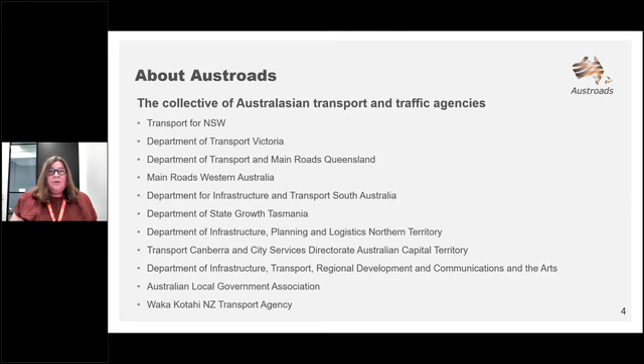So a bit about Austroads. We're the collective of Australasian transport and traffic agencies, and that's the organisations that are listed on this slide. Our focus is to support our member organisations to deliver an improved road transport network. So today's project was delivered under the Transport Infrastructure Program, and that program is managed by Ross Guppy.

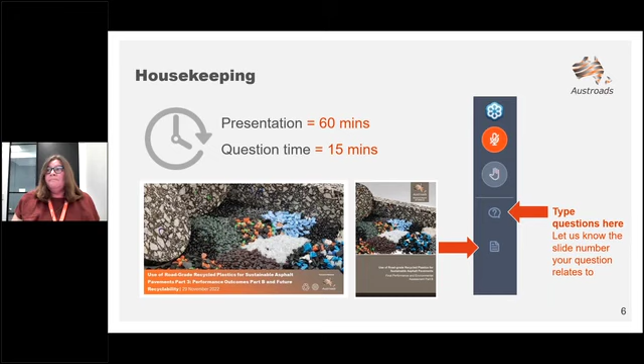The first presenter is Andrew Papacostas. Andrew is the Principal Engineer, Pavements, Geotech and Materials at the Department of Transport, Victoria. Our second presenter is Associate Professor Filippo Giustozzi. Filippo is leading the Intelligent Materials for Road and Airport Pavements Research Group at RMIT University. We are also joined by Yoongjai Boom, a Civil Engineering PhD student at RMIT University, and Dr. Marie Enfrin and Dr. Dai Lu Xuan, postdoctoral research fellows at RMIT.

So today's agenda: we'll first hear from Andrew, who's going to introduce the project. Then Filippo will take us through laboratory testing of incorporating recycled plastics into asphalt via the mixed method. We'll hear about emissions from plastic modified asphalt presented by Yung, followed by Marie, who will talk about microplastics release from plastic modified asphalt. Di will focus on future recyclability of plastic modified asphalt, and the presentation will then be concluded by the summary of project findings from Filippo.

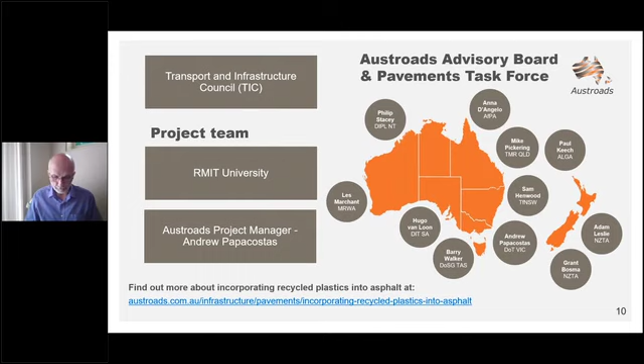Today's webinar presents findings of the remaining comprehensive testing that was completed and recently published in report number 3B. All reports and previous webinars are freely available from the Austroads website. I now hand over to Filippo to provide the outcomes of the remaining testing that was undertaken and reported in report 3B.

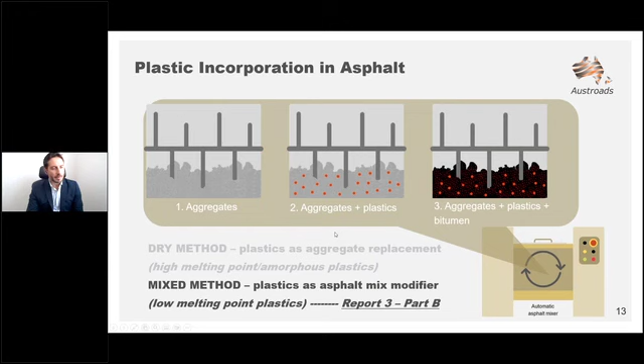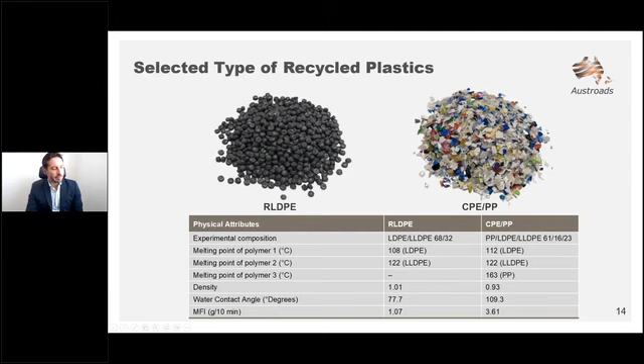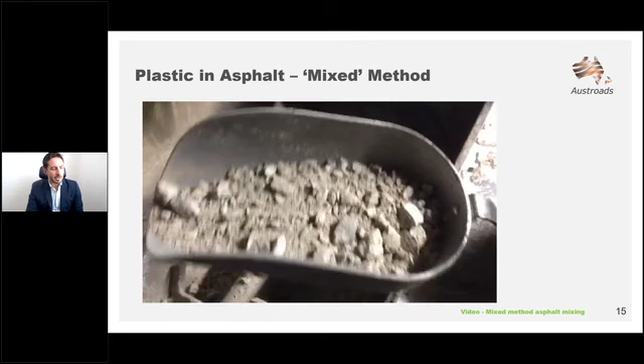Just a quick video in terms of how the mix method actually works. It may be a bit laggy at your end, but Austroads has provided you with the video in the hand-out materials. So you've seen there plastics being added to the aggregates only, and after a thorough mixing, the plastic has basically disappeared. This is what you get at the end of the mixing between aggregates and plastics before adding the binder.

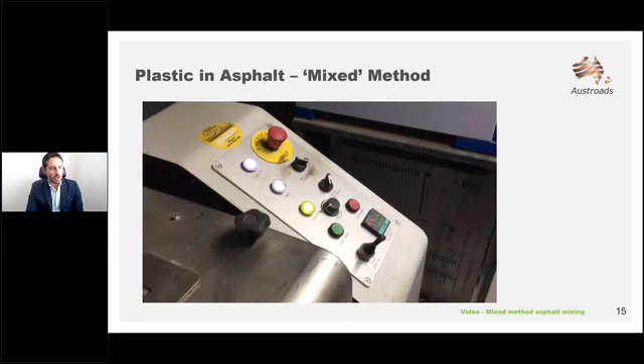After this step, everything goes on according to the standard mixing operations. If you want to see a few pictures about this process: at number 1 on the left-hand side, these are the aggregates in the mixer. Number 2, we just added, in this case, the commingled version of polyethylene and polypropylene you've seen before, onto the hot aggregate. Number 3 is actually the final product of the plastics melted around the aggregates before the bitumen is added.

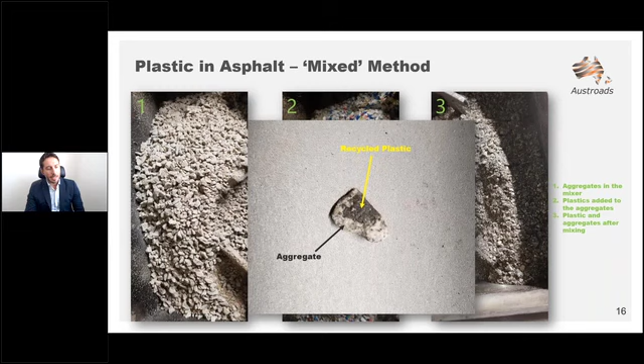If you zoom in on number 3 and isolate one particle, this is actually how it will look, where you have an aggregate that may or may not be coated with recycled plastics. So this is the mix method procedure.

In terms of mix designs, we have been using neat C320 binder, bitumen. If you are joining us from other countries outside of Australia and you're not familiar with the classification grade, a C320 binder can be something similar to a 50, around 50 penetration grade, and you can see all the values in that table down at the bottom.

The binder content was 5.1% by mass of the mix, and we used 3 different dosages of recycled plastics at 0.5, 1, and 1.5% by mass of the aggregates. I'm going to show you in the next few slides why a maximum limit of 1.5% was put for this particular experimentation.

We also compared the mix design at 0.5, 1, and 1.5% plastics with standard conventional polymer modified binders, specifically an A35P, which, if you're outside Australia, is a combination of 5 to 5.5% EVA polymer. We also compared the results with unmodified C320. The aggregate gradation was that of a wearing course, and the mix design was registered in Victoria. The maximum nominal aggregate size was 14 millimeters.

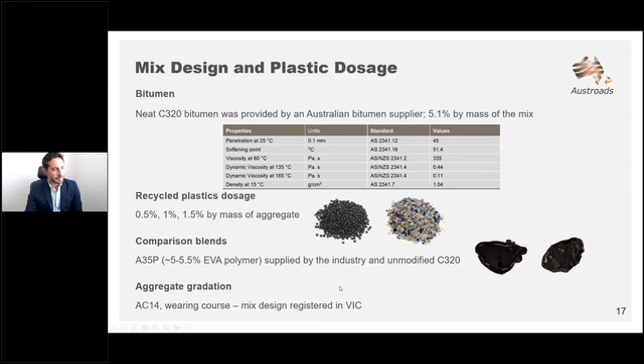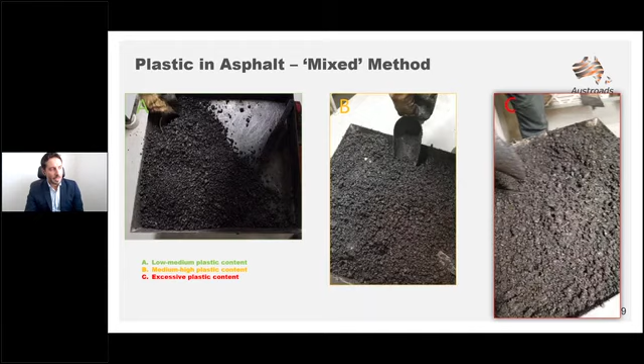Now, in terms of moisture damage, we looked at the tensile strength ratio of the different mixes. In the blue zone you have the post-industrial plastics, and in the green zone the post-consumer type of plastics. The first thing to notice is that within the post-industrial plastics, the results were quite consistent and high, above 80%. Usually in Australia, 80% is the threshold value for assessing tensile strength ratio. There's obviously an increase in the dry tensile strength of the mix, also observed in the green zone for the other type of plastic, an increase in the dry tensile strength of the mix.

But you can see the TSR value goes down all the way to 64.6%, and that, as I said, is probably related to the high melting point of the polypropylene that doesn't fully melt when added to the aggregate. Maybe higher temperature and longer mixing time will fix this.

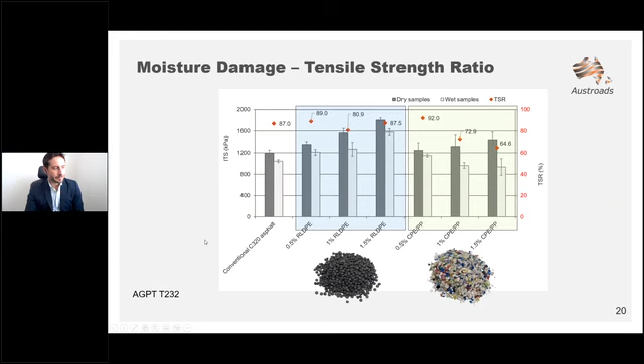When it comes to fatigue, it depends on the type of plastic being added. If you look at the fatigue charts, the green curves relate to post-consumer plastics—the more plastic you add, usually the better the fatigue performance. But there's a big difference between the green curves and the gray curves, which relate to post-industrial plastics: 0.5%, 1%, and 1.5% RLDPE. The black line is the conventional unmodified asphalt mix, and the red line at the top is the conventional polymer modified asphalt. For 1.5% RLDPE, fatigue performance is quite similar to conventional polymer modified asphalt, ranging from an improvement of 27.6% up to 154% compared to conventional asphalt.

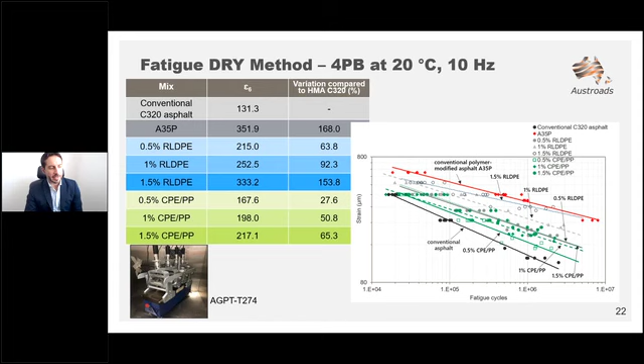So this methodology is quite effective in reducing rutting, and if you select the right type of plastic, it can also be effective in enhancing fatigue and durability. Concluding the asphalt assessment, you'll find many more data sets in the full report—resilient modulus, cracking tolerance, and many other parameters. But to keep it within 60 minutes, we have to cut some things down.

Concluding on this part, the mix method provided significant enhancements, much more than the other two methodologies. The type of plastic is obviously important—I showed you the difference between RLDPE and the commingled version of PEPP. Be aware that this can affect the densification behavior, how easy it is to compact, depending on how much plastic you use and the type of plastics.

Rutting was definitely improved, and in 3 out of 6 cases, the plastic modified mixes were better in rutting compared to the A35P conventional polymer modified asphalt. Fatigue resistance was also improved, between 27 and 153% extra fatigue life compared to unmodified asphalt, and in 1 case out of 6 mixes, there was comparable fatigue resistance with conventional polymer modified asphalt.

So out of the two, probably the RLDPE was better, likely because the mixing temperature was equal between them. If there is addition of plastics containing polypropylene, it may be suggested to increase the temperature a bit higher compared to when there is only polyethylene. One type of recycled plastic, the commingled version, seems to suffer from moisture damage, as shown through the TSR ratio. I'll now hand it over to Yongjia to talk about potential emissions from asphalt.

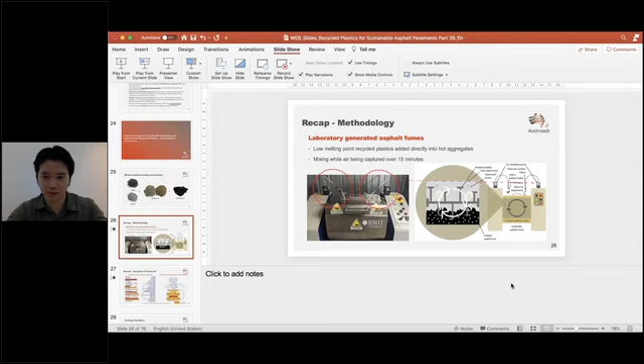Sorry to interrupt, we just can't see your slides at the moment. Is that better? They're just not on slideshow view. We've just lost them again. Can you see it now? No. Do you want me to? I might just throw the— oh, there we go, that's it. Perfect, well done. Sorry about that, anyway, I'll jump right in.

Just to recap, as we revisit these images, recycled LDPE and commingled PE/PP were selected for the mix method. Basically, the idea here is that upon contact, the plastics would melt and form a layer of coating over the aggregates, and some of them will stay as a solid part of the aggregates until hot bitumen is added into the mixing process to combine and produce the actual asphalt mix.

Do note that specifically for the emissions test, each plastic was added individually to form specific blends—in no instances would we actually use two plastics at the same time to create an asphalt mixture. As described in previous webinars and in the report, the fume generation mechanism used for this study employs a temperature-controlled automatic asphalt mixer, or pug mill, and personal air sampling pumps, circled in red, are attached to a fabricated lid that sits on top of the opening of the asphalt mixer.

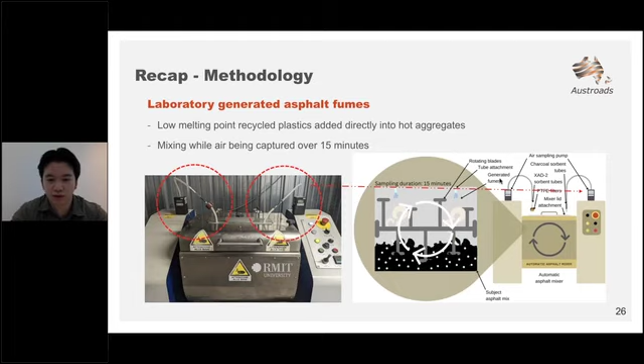After the sampling process, these sorbent tubes and filters were brought to the lab and extracted via a solvent extraction method, then injected into a gas chromatography mass spectrometer, or GCMS for short.

Specifically, benzene from the VOCs and benzo(a)pyrene from the PAHs are two analytes heavily monitored in the work environment, hence their inclusion in this study. A deeper analysis was conducted for each to understand if using recycled plastics would increase or decrease the possibility of these carcinogens.

As usual, a range of testing variable combinations were conducted for the mixed method. Plastic content ranged across 0.5%, 1%, and 2% by mass of the asphalt mix, while working temperature ranged from 140, 160, and 180 degrees Celsius. Note that asphalt mixes containing CPE/PP were only conducted at 160 and 180 degrees, as the plastic has a higher melting point than 140, so it was not considered.

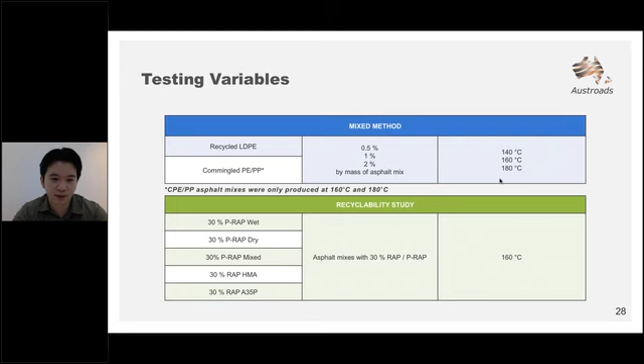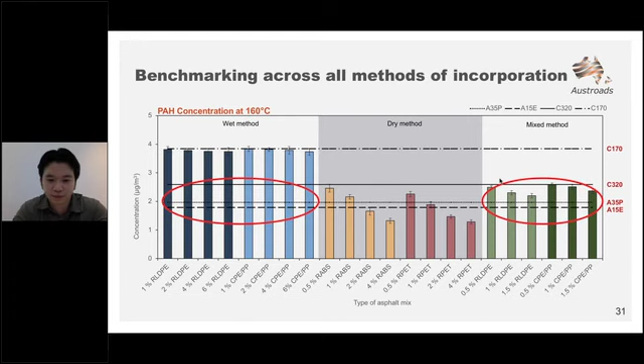So I guess there are basically endless ways of interpreting these results. But if there was one takeaway message from today, it's that recycled plastics do in fact reduce emissions from an asphalt perspective.

Based on these results, we can conclude that the effect of working temperature plays a significant role in determining the overall emissions, regardless of plastic type or content. The use of recycled plastics, regardless of their type, can reduce both PAH and VOCs, as mentioned earlier. But the plastic content itself will be the determining factor.

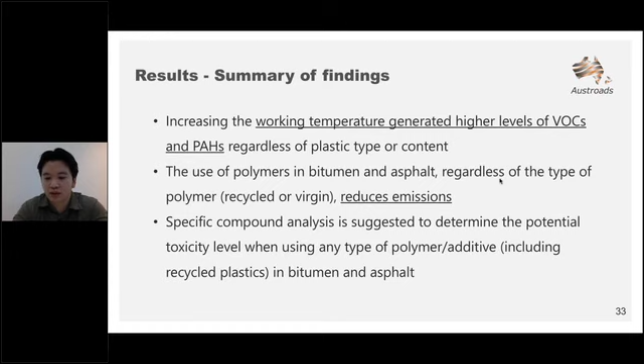Finally, a compound analysis is suggested to be conducted in order to understand, from a carcinogen perspective, what the actual recycled plastics may cause.

When going through the emission studies in this or any other previous reports, it's quite important to note that bitumen from different sources will produce different emission levels. Therefore, the measurements in this study cannot represent all bitumen and asphalt in the industry.

The lab-generated fumes in this study are presented as a worst-case scenario, and they cannot be used as a replacement for on-site testing. Finally, the objective of this study was to investigate the effects of recycled plastics compared to conventional methods. Therefore, it cannot be considered as a toxicological assessment.

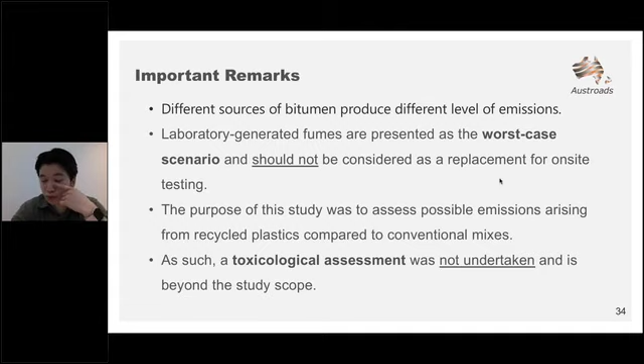Thank you, Youngja. So after looking at the emissions from plastic modified asphalt, we had a look at the release of microplastics from plastic modified asphalt.

So why microplastics? Well, if you think about it, when a road is laid and open to traffic, road dust is generated. This road dust can be made of many different materials, such as truck and car tires, construction materials from nearby construction sites, organics, road marking materials, and of course the materials coming from the road itself, being bitumen and the aggregates.

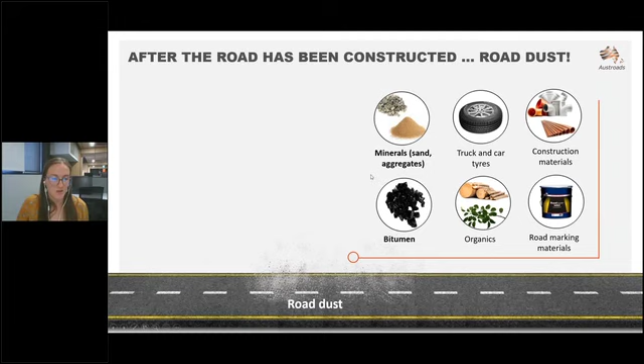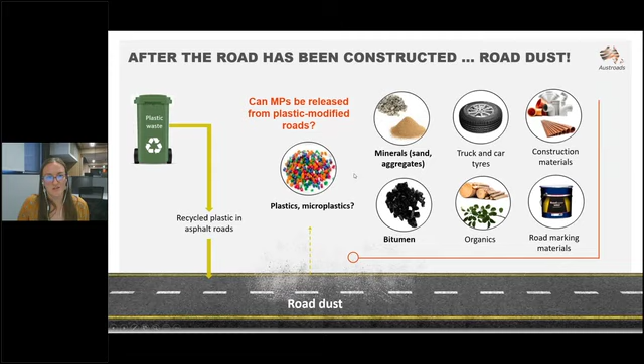So now if we think about adding recycled plastics into roads, then microplastic could also be released in road dust. So the question is, can microplastics be released from plastic modified roads?

In order to answer these questions, we developed a new procedure, and we used a new testing machine called the wet track abrasion machine. This abrasion machine works by using a rotating head, as you can see here, which is in contact with an asphalt sample, and this is used to simulate abrasion as it would occur on the roads with the cars.

This is just a top view of what you can see from the top part of the machine. So you can see the asphalt sample that is maintained here in the pan, and it is covered with water. The reason for using water is because the particles released due to abrasion need to be collected in the water. If there was no water, they could just be spread across the air and we would lose a lot of particles. The second reason is to prevent overheating of the asphalt sample.

Below the rotating part here, there is an abrasion head made of metal, and this is what we use to generate abrasion on the asphalt sample.

There are different parameters to optimize before finding the optimum abrasion procedure. The first was temperature: at which temperature do we run the test, for how long, and at which pH, since we're using water here so we're able to vary the pH. After running several combinations, we found that the optimum parameters were 60 minutes at pH 7 and 25 degrees Celsius.

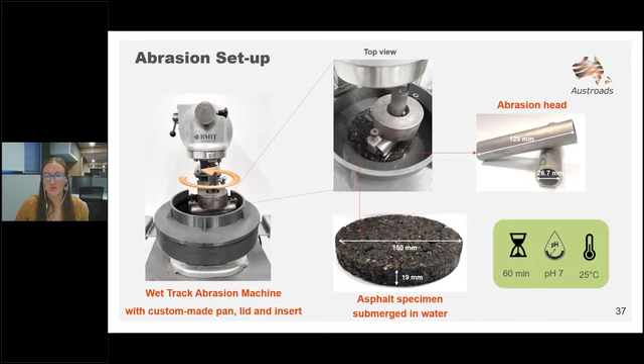To maintain a temperature of 25 degrees Celsius, we placed the abrasion machine into a climatic chamber. But that was the easiest part. The hardest part was actually to extract the microplastics from whatever was released from the asphalt sample. And this is how we did it.

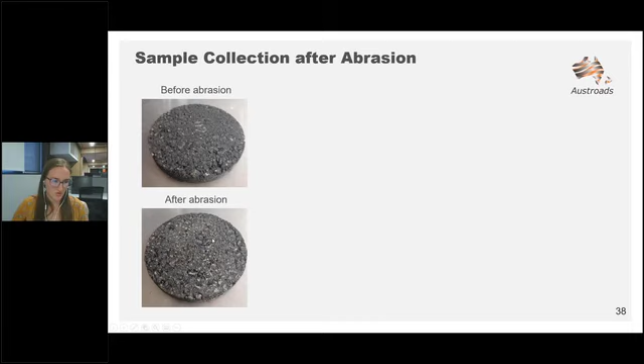Here are two pictures of an asphalt sample before abrasion on top and after abrasion at the bottom. You can clearly see the aggregates starting to show up through the normal bitumen coating, meaning that residues were definitely removed from the asphalt sample. This is what it looks like afterwards: basically dirty, blackish water.

What we did first was extract the particles from this water through a series of filters, and after that we got clean water on one side and dry particles on the other. These particles were actually a mixture of bitumen, aggregate, and microplastics.

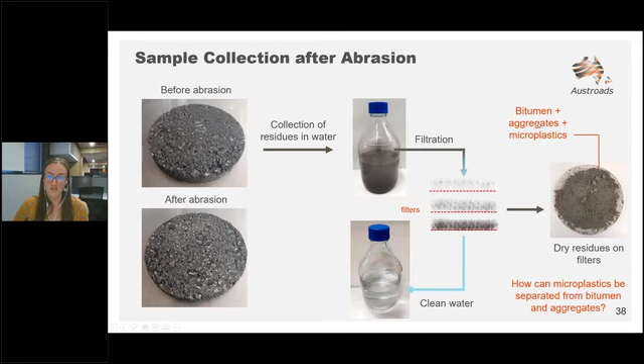So the next question was: okay, we got the dry residues, but now we need to extract the microplastics from this mixture. So we designed an extraction procedure that I will describe to you quickly now.

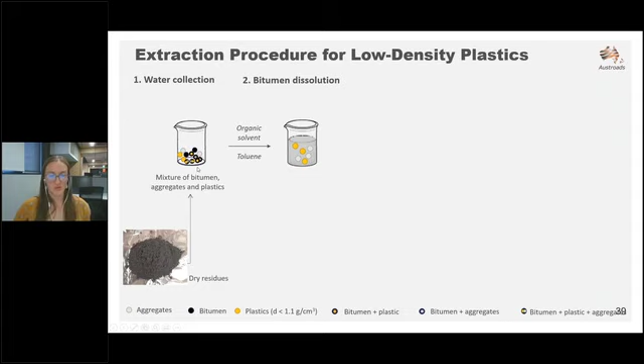The first step was to remove the bitumen particles from the mixture using an organic solvent. Once the bitumen was removed, we used another organic solvent to separate the aggregates at the bottom from the plastic at the top by density separation.

The density of the plastics was much lower than the density of the aggregates, so they floated in this solvent. We were able to recover the plastic particles on one side and the aggregates on the other. As for the bitumen, we simply had to evaporate the solvent used to dissolve it to recover the bitumen residues.

Thanks to this protocol, we were able to determine the mass of microplastics as well as their size, the mass of aggregates, and the mass of bitumen.

I know it's only a schematic and drawing, so I've prepared a video to show you the principle of density separation. This is not exactly what I used to extract the microplastics from the residues, but it's an example to show you the technique.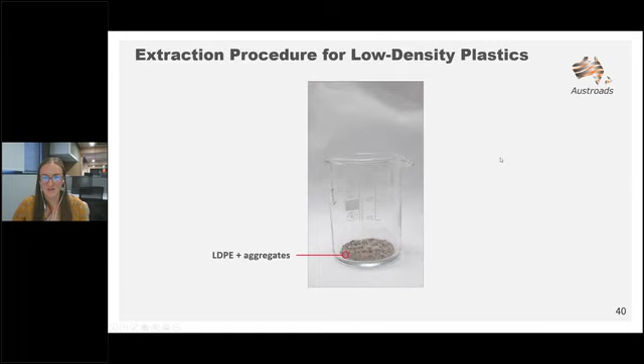I made a mixture of LDPE and aggregates, and then added the organic solvent that I used for density separation, in this case dichloromethane.

What you can see is that the black particles, which are actually polyethylene particles, start floating straight away. So what you end up with is aggregates settling at the bottom of the beaker and polyethylene floating at the top. This is the principle I used to extract the microplastics from the residues.

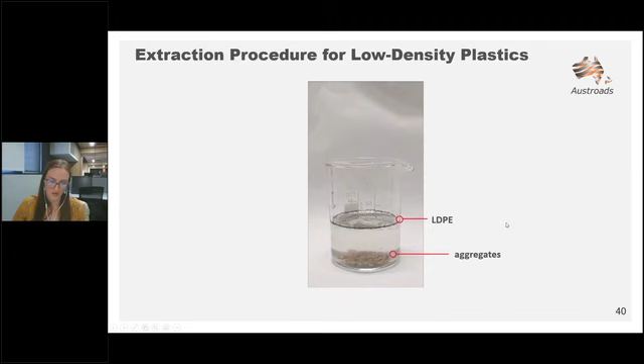Now let's have a look at the asphalt samples. In previous webinars, I presented the release of microplastics from asphalt modified with plastic via the dry method and the wet method, where the plastics were either used as aggregate substitutes, spread like this in the asphalt sample, or with the wet method spread within the bitumen matrix, distributed even more differently in the asphalt.

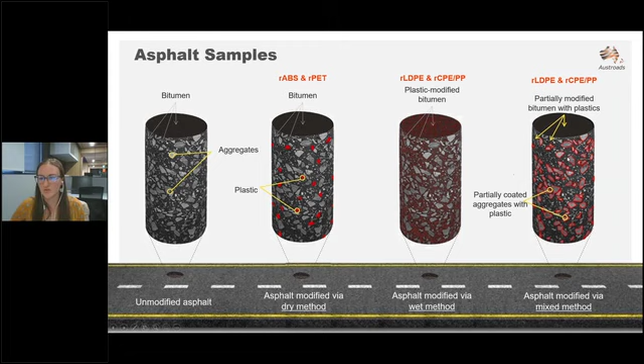Today I'm going to show you results of the release of microplastics from asphalt modified via the mixed method. As Filippo and Yongja mentioned, the plastics are used as coating around the aggregates and can also diffuse partially into the bitumen. The release of microplastics from those samples was presented during the previous webinar, so if you're interested, have a look on our website. Now we're going to focus on the release of microplastics from this sample here.

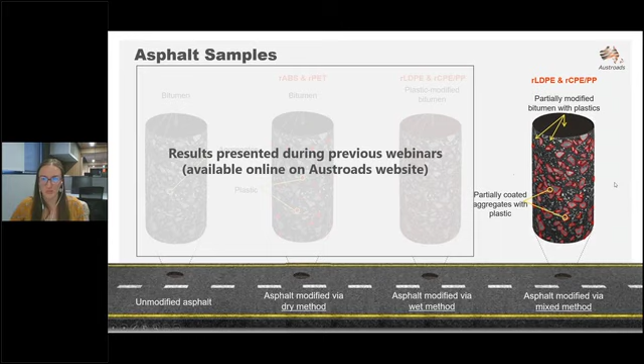Let's have a look first at the release of residues. When I say residues, it means aggregates, bitumen, and microplastics.

So as you can see, when the asphalt is modified by CPE/PP or RLDPE, the trend is different in terms of residues. Compared to a C320 reference with 0% plastic, increasing the content of CPE/PP actually worsens the release of residues, whereas using RLDPE reduces the release of residues. So RLDPE actually improves the adhesion between the bitumen and the aggregates, contrary to CPE/PP.

And if you remember the result that Filippo showed you, this is actually consistent with the TSR results, where using CPE/PP worsens the tensile strength ratio compared to RLDPE.

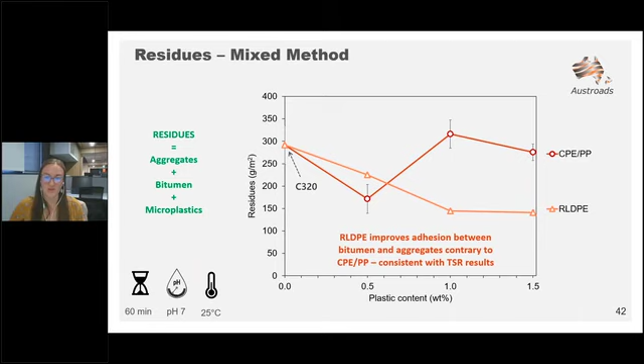Now let's focus on the microplastics, which is the main focus of this talk. So microplastics only, no bitumen, no aggregates.

Looking at CPE/PP and increasing the plastic content in asphalt, the amount of microplastic increases with the plastic content. Whereas when we use RLDPE, it increases up to 1%, but then the release of microplastic is constant.

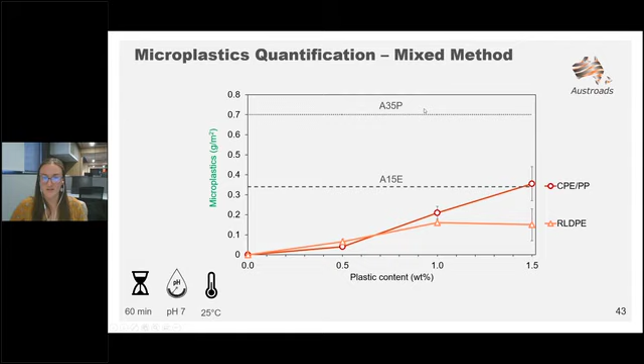If you compare that to two different benchmarks, A35P and A15E, the same as what Yongja used during its emission study, you can see that none of the asphalt mixes release more microplastic than the A35P. And most of them release less microplastics than the A15E benchmark, which is good.

But there is still a difference between the two plastic mixes. That can actually be due to unmelted or poorly melted CPE/PP particles in the asphalt mix that could cause weakness points in asphalt. And that can also be due to the initial particle size and shape when it was mixed in asphalt.

If you remember the video that Filippo showed you, they used CPE/PP as an example, which was made of colorful but irregular plastic fragments, whereas RLDPE was very regular and spherical, in the form of pellet particles. So this could also have played a role in the proper mixing of CPE/PP and RLDPE.

To make these mixes, we used the same mixing conditions and temperature, but of course modifying this could have led to different results. But with these conditions, CPE/PP can create weakness points in the asphalt.

Now let's have a look at the size of the microplastics, because the size of microplastics can impact their toxicity when they are released in the environment.

The microplastics released from CPE/PP are shown on this side and RLDPE on the other side. The first fraction we recover is the smallest one, between 0.45 microns and 2.7 microns. Here you can see 3%, 11% - it is quite similar between the two asphalts.

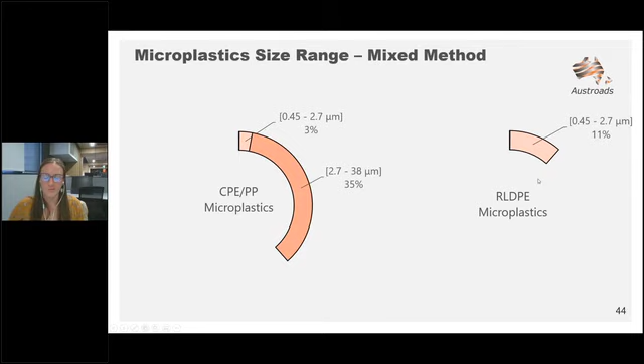Now let's move on to the second largest size fraction of microplastics. It is a bit higher for RLDPE modified asphalt. The third fraction is similar between the two, and the last fraction, the highest, is for CPE/PP.

So what do we need to understand from these two schemes? Microplastics released from CPE/PP are much larger than those released from RLDPE, with almost half of them larger than 300 microns, whereas for RLDPE most of them are between 2.7 and 38 microns.

And that is actually consistent with the fact that some of the CPE/PP plastic particles may not be properly melted in the asphalt, which leads to a higher rate of microplastics.

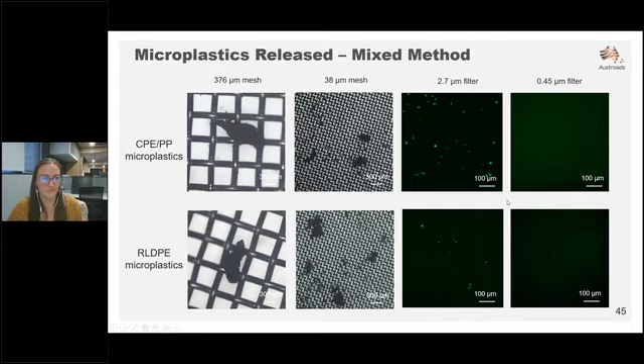So what do you need to remember from this result? Well, first of all, RLDPE improves the adhesion between the bitumen and the aggregates when incorporated in asphalt via the mix method, contrary to CPE/PP. And this is consistent with the TSR testing that was done on the asphalt samples.

CPE/PP can be poorly melted when mixed with asphalt, depending on the duration of mixing and the temperature used. That can lead to weakness points in the asphalt, which increases the release of microplastics from this asphalt mix. Finally, the size and shape of the plastics can also impact their incorporation in asphalt, so that must be monitored and controlled.

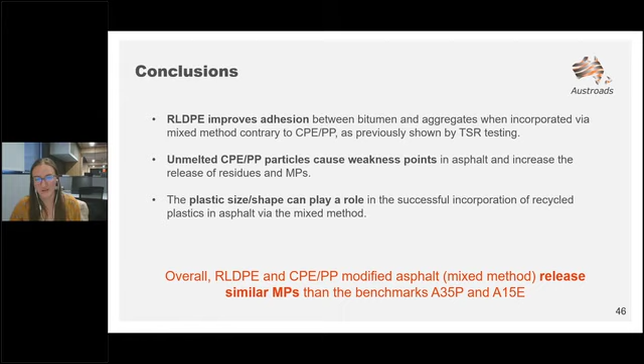But overall, RLDPE and CPE/PP modified asphalt mixed method released similar microplastics to the benchmark A35P and A15E that we used as references. Now let's have a quick look at the methods we investigated throughout this project.

The first method was the wet method, and with the wet method there are different trends in terms of microplastics released. A low plastic content can lead to a high release of microplastics due to poor adhesion between the bitumen and aggregates, whereas high plastic content also releases a high amount due to phase separation. For this method, an optimum dosage of 2 or 4% of plastics reduces the release of microplastics.

For the dry method, only ABS using a low plastic content releases a high amount of microplastics, and this was mainly due to the size of the ABS particles used in the asphalt.

Regarding the mixed method, the results I just presented show RLDPE clearly releases less microplastic than CPE/PP, and that's because CPE/PP can be partially melted in the asphalt. Comparing that to the two benchmarks used since the beginning, all the asphalt mixes release similar, if not lower, microplastics compared to these two benchmarks. Therefore, if we incorporate recycled plastic in roads, it will not release more microplastics than the commercial polymer modified asphalt already being used to make roads.

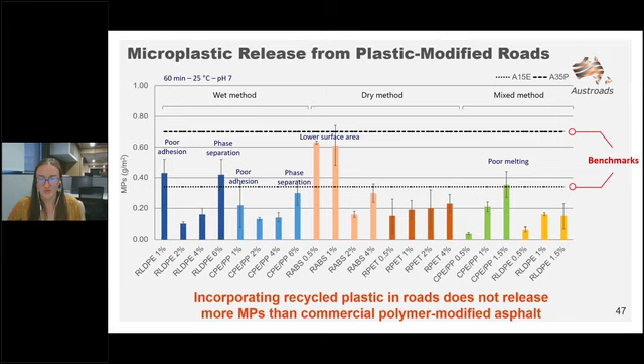I will now hand it over to Dai, who is going to talk to you about the recyclability of these asphalt mixes.

Thank you, Marie. Good afternoon everyone. I'm going to talk about the future recyclability of plastic modified asphalt concrete.

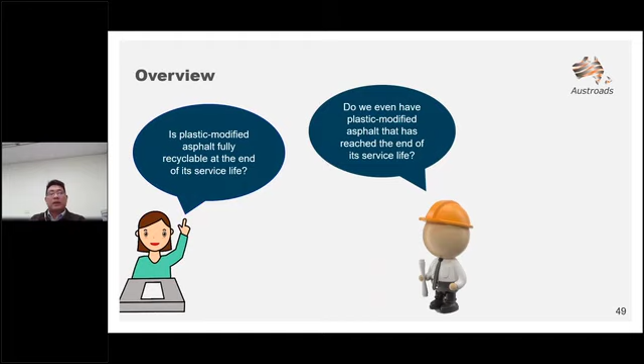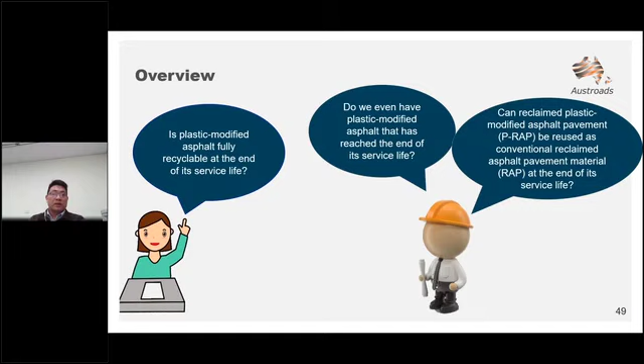Again, the main purpose of this study is to answer the question: is plastic modified asphalt fully recyclable at the end of its service life? However, we also ask ourselves, do we even have plastic modified asphalt that has reached the end of its service life? And can reclaimed plastic modified asphalt pavement, which we call P-RAP, be reused as conventional reclaimed asphalt pavement material, which we call RAP, at the end of its service life? So today we're going to find out the answers to this question.

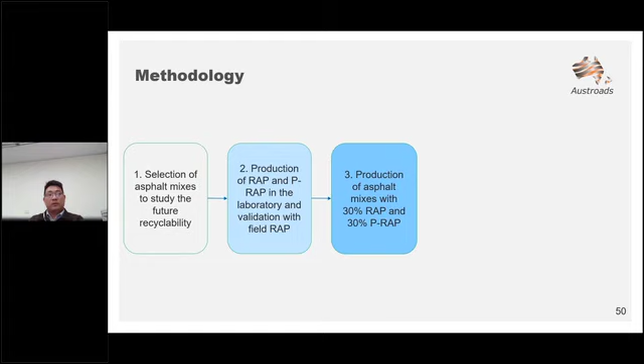This study includes 5 main steps. The asphalt mixes were first chosen to produce RAP and PRAP, and then the RAP and PRAP were produced in lab conditions. After that, asphalt mixes incorporating 30% of RAP and PRAP were produced, and samples were prepared for mechanical tests and environmental tests.

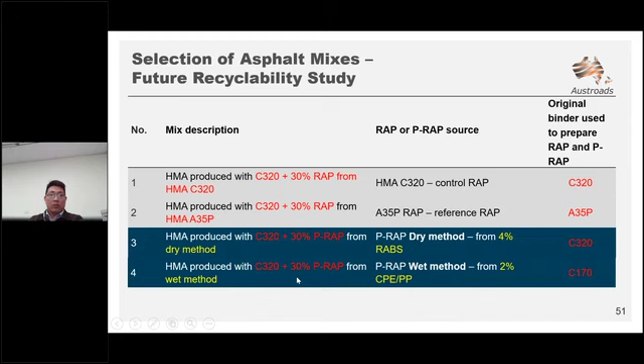In this study, we use 5 different asphalt mixes with 5 different types of RAP and PRAP, and all asphalt mixes use C320 bitumen as the first binder. For RAP and PRAP, we have one RAP from hot mix 320 as a control RAP, and another one from A35P as a reference RAP. For PRAP, there are 3 types: one from the dry method, one from the wet method, and one from the mixed method.

To allow homogeneous aging, the maximum thickness of the loose mix in a tray was kept at 14, which is the nominal maximum aggregate size of AC14. The parameters or assumptions used to determine the time and temperature include the weighted mean annual pavement temperature of 24 degrees Celsius for Melbourne, the surface temperature of the surface asphalt layer of 50 mm thick, to simulate field aging of approximately 10 years.

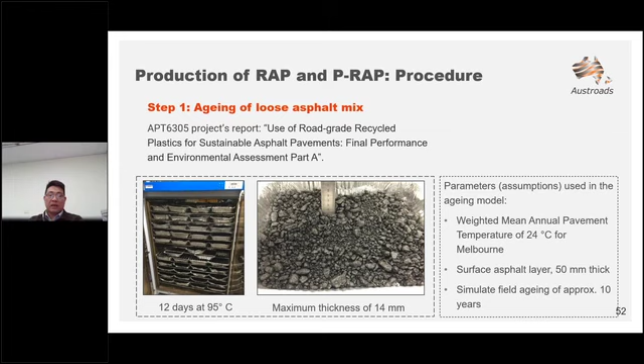In step 2, which started when the aging procedure was finished, the loose aged mix was crushed using the Los Angeles machine. Several trials were conducted with different revolutions using 12 steel balls for crushing the loose mix.

After each crushing trial, the binder was burned off in the furnace and the aggregate gradation was checked. If the RAP gradation passed the threshold, that crushing protocol was chosen and the RAP was used as the final RAP for the next step. But if the RAP gradation failed to meet the threshold, the trial continued by increasing the number of revolutions in the Los Angeles machine, and similar steps were applied again until the gradation of RAP met the threshold.

So we can see here two pictures: the top one is from the RAP produced in the RMIT lab, and the other one is from the field. Visually, they look quite similar.

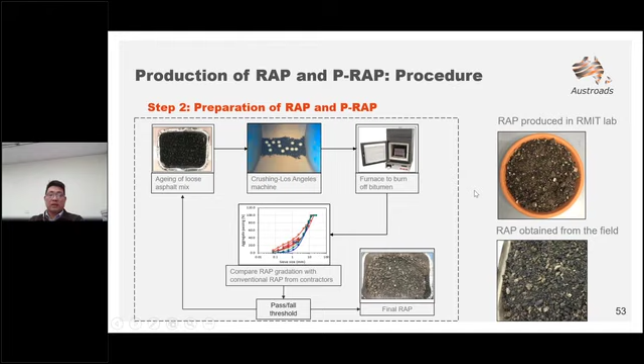So the lab produced RAP was checked for its extracted binder and gradation. As we can see here, from the FTIR binder test on RAP, it shows the jump in the peaks of carbonyl and sulfoxide of the RAP binder compared to the neat binder. And looking at the carbonyl and sulfoxide index, we can see a significant increase of those indices compared to the neat binder. This result indicates substantial aging occurred in the RAP binder via the proposed aging protocol.

It should be noticed that the lab aging protocol chosen in this study was aimed to simulate 10 years of aging in the field.

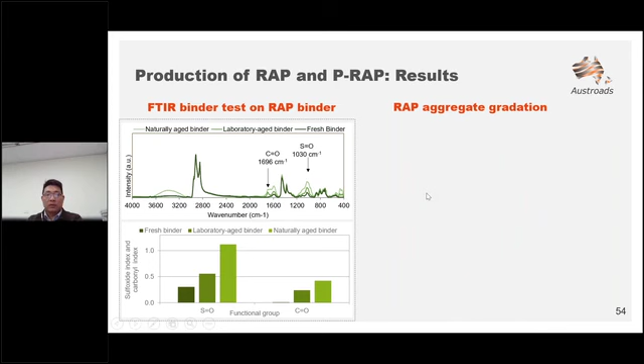For the RAP gradation, we collected the gradations of field RAP with nominal aggregate sizes of 10 and 14 mm from contractors across Australia and New Zealand, and used them as references, as you can see here in the grade curves. The RAP curve is the gradation of RAP produced in the RMIT lab, and it falls within the range of the reference curves. So this RAP gradation was used for the further step.

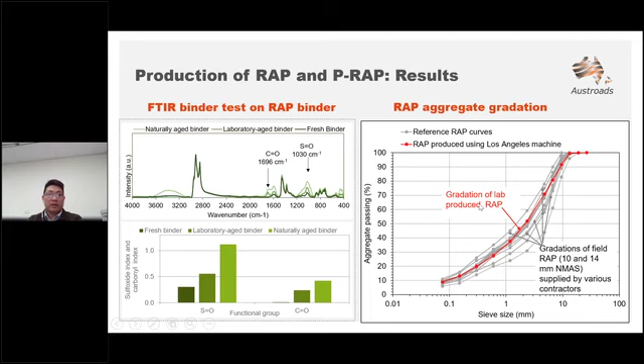With the final RAP gradation information, it was incorporated with the natural aggregate to produce the final aggregate gradations of asphalt mixes with 30% of RAP and P-RAP. With the mix design ready, the loose mix asphalt was produced, and the asphalt samples were prepared for mechanical and environmental testing.

So the first investigation, we looked into the compactability of asphalt mixes. This test aims to evaluate the densification behavior of asphalt mixes under certain compaction energy. During the compaction, the sample height is reduced because it gets denser.

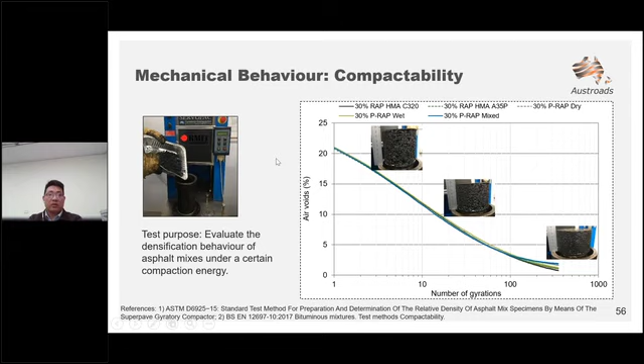As we can see, the incorporation of 30% RAP and P-RAP did not show much difference before 100 gyrations. But after 100 gyrations, there was a deviation in the densification behavior, mainly affected by the source of RAP and P-RAP used in the mix. However, overall, the inclusion of 30% P-RAP didn't show an adverse effect on the compactability of asphalt mixes compared to the RAP.

The next mechanical behavior investigation is moisture resistance. In general, the asphalt mixes with RAP and P-RAP have a quite similar tensile strength ratio, ranging from 70 to 78%. It should be noted that the minimum requirement by Australia and New Zealand standard is 80%. This result was obtained using the mixing protocol in which the natural aggregate was heated at 185 degrees and the RAP and P-RAP was heated at 95 degrees Celsius.

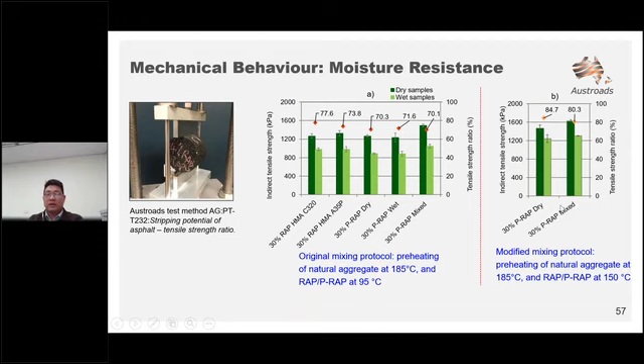After that, we decided to increase the mixing temperature by increasing the preheating temperature of RAP and PRAP to 150 degrees, and we found that the tensile strength ratio increased to 80 and 85% for 30% PRAP mixed and 30% PRAP dry. This means that the mixing temperature is very important when we incorporate a high percentage of RAP and PRAP.

The result of this moisture resistance test also indicates that the addition of PRAP mixes resulted in similar moisture resistance compared to conventional RAP.

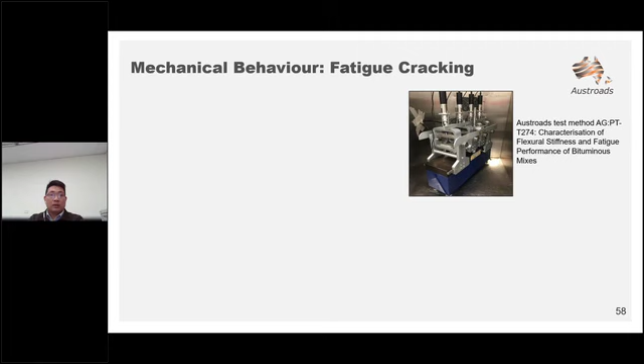The reason behind that was, if we recall from report 2, the 30% RAP in the wet method was produced with the fresh binder C170, and the result of the mix with C170 has an epsilon 6 slightly lower than hot mix C320. This could be inherited in the RAP result, leading to the 30% RAP wet method being slightly lower than 30% RAP hot mix with C320.

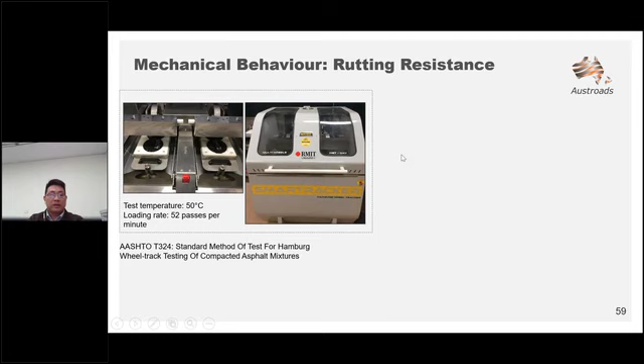The next mechanical behavior we look into is rutting resistance. The test was run at 50 degrees Celsius with a loading rate of 52 passes per minute. During the test, the rut depth and number of passes were recorded, and we used the rut depth at the end of the test, at 20,000 passes, as the indicator of rutting resistance to compare performance between asphalt mixes.

In general, we can see the 30% PRAP mixes show an improvement compared to the 30% RAP with C320. This is not the case for 30% PRAP wet, because the PRAP was produced with C320 modified with 2% plastic. The original results for C320, C170 asphalt mix showed a rut depth of around 9 millimeters. So the result here shows significant improvement in terms of rut depth for this asphalt mix.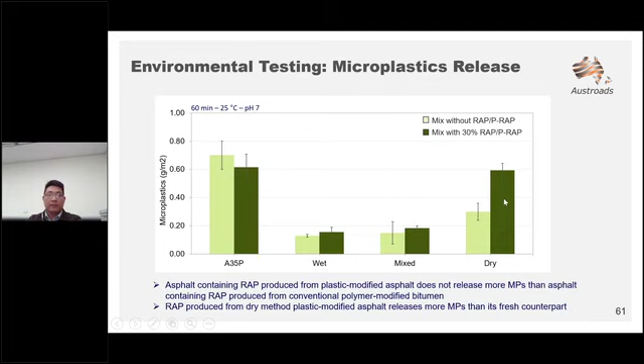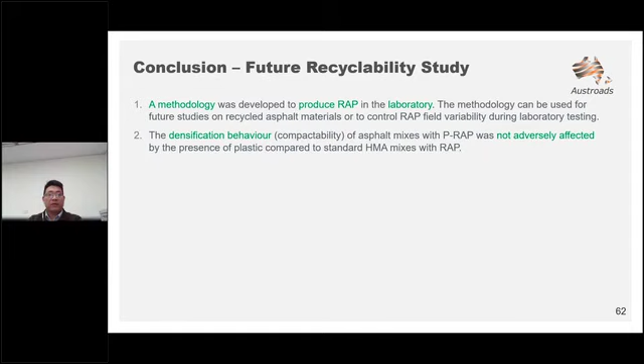The densification behavior, or compactability, of asphalt mixes with PRAP was found not to be adversely affected by the presence of plastic compared to a standard hot mix with RAP.

The moisture resistance of asphalt mixes containing PRAP was found to be similar to that of the hot mix with RAP. We also found that mixing temperature was crucial, and it was found to affect the moisture resistance of asphalt mixes with high RAP content, regardless of the use of plastic.

Overall, the inclusion of PRAP didn't have an adverse effect on the cracking and rutting resistance of asphalt mixes. We also found that asphalt mixes containing PRAP do not produce higher levels of emissions compared to asphalt mixes with conventional RAP.

In terms of microplastics, it was found that asphalt mixes containing PRAP also did not release more microplastics than asphalt mixes with RAP produced from conventional polymer modified bitumen. So overall, this study concludes that PRAP can be used as conventional RAP in new asphalt mixes. Now I'll hand it over to Filippo.

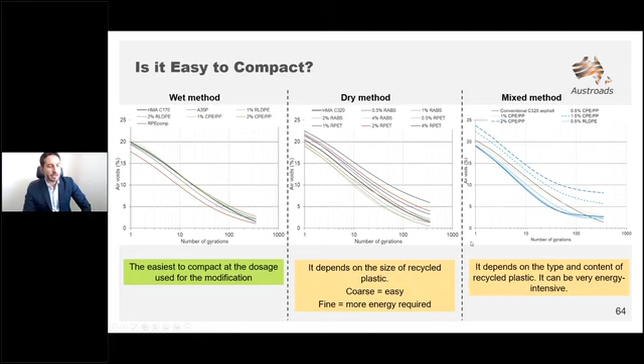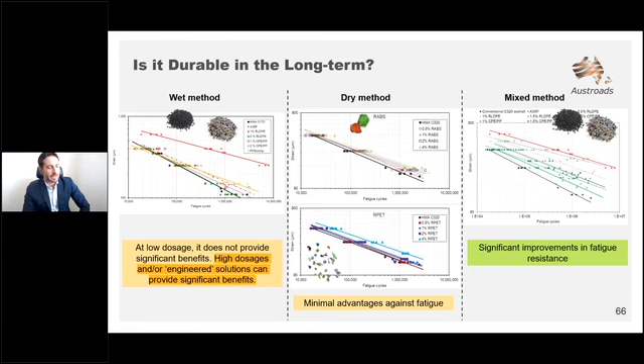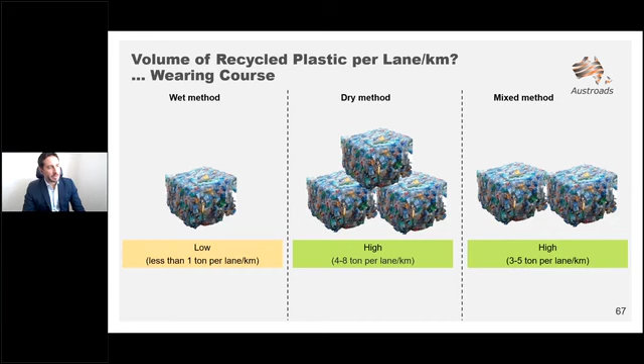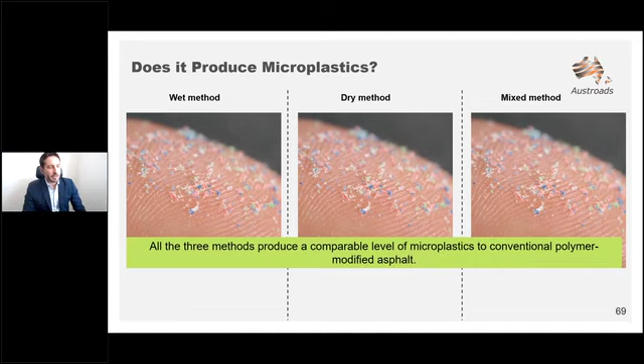Does it produce microplastics? Again, the 3 photos are kind of the same because all 3 methods produce a comparable level of microplastics to conventional polymer modified asphalt. We found very similar levels, and that's why the 3 photos are actually the same. So if you're asking what type of plastics you can use in asphalt, I would suggest you go back one step and look at report 3A.

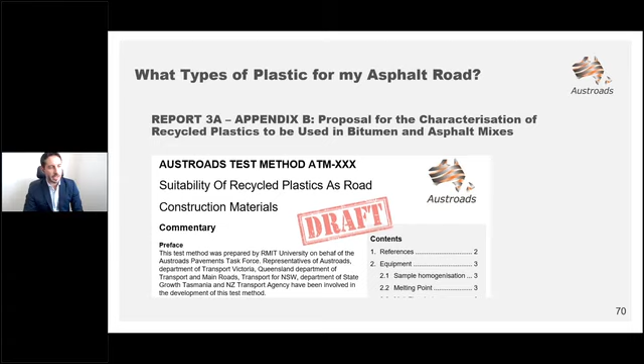The one we are presenting today is Report 3A, especially Appendix B, where there is a proposal for the characterization of recycled plastics to be used in bitumen and asphalt mixes. This is kind of a characterization of the plastic itself, so if you are a plastic supplier, you may want to have a look at it, because it contains valuable information for you to validate your product and for possible uses in bitumen and asphalt.

Are there any performance related or performance based specifications for plastics in roads? Again, if you go back and look at Report 3A Appendix C, we have developed a proposal for the performance based evaluation of bitumen and asphalt incorporating recycled plastics. This has been divided for local roads and medium to high traffic roads. There's a lot more information and detail in Report 3A Appendix C.

We've also generated these sort of performance graphs, which are basically independent of the type of mix design, the quantity of bitumen you're using, and you simply plot two of the properties you're interested in, out of a few other parameters described in that appendix, to see how your product compares with conventional asphalt or conventional polymer modified asphalt. Usually, if the plot is moving towards the top left corner of the graph, it means lower rutting and higher fatigue life, so definitely better.

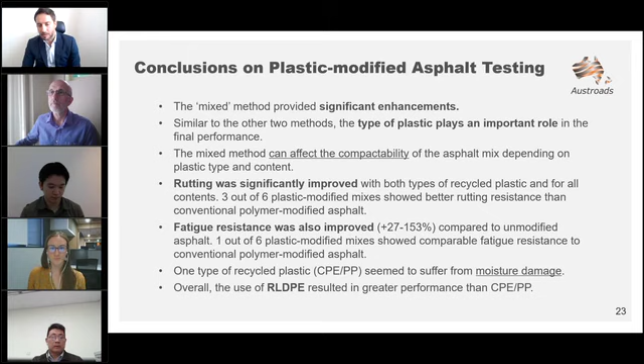No, as I just said, probably in the last slide or the second last slide, with Appendix C in Report 3A, we wanted to get out of the specificities of each and every single mix design. So the addition of those performance graphs was actually put in place exactly for avoiding that, during each and every single qualification or characterization of asphalt, we had to go through all the tests again and again and again. So if you think about that central point of the performance graph, that's your benchmark point.

If that's your benchmark, and it's used, like an open graded or an SMA or a dense graded or a gap graded mix with different binder content, you just follow the standard procedure for testing that and see how your particular mix design or your proposed mix design compares to that, and you provide the data to the client or to the approver or the decision maker in that case.

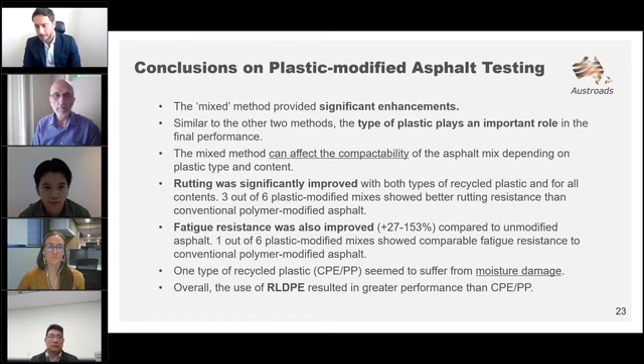Okay, slide 33. Yeah, that probably doesn't match the question, but the question related to the amount of plastic used.

1.5% seems to be about the maximum that you would utilise in the mix method. Do you see any advantages in trying to go higher? No. Well, it's probably not related to slide 33, which is about emissions, but no, in general, we found it difficult to mix more than 2% by weight of the aggregate. Again, it's not 2% by weight of the binder, it's by weight of the total mass of the aggregate, so it is quite a lot of plastics. You have probably seen the video where Dai was mixing it in the lab, and it was pretty much all covered by plastics, even at 1.5%. So it becomes quite sticky and difficult to compact, and a bit solid as a mix, not really workable. That doesn't mean that if you go up with temperature, like 190 plus, you can't still make it work.

Maybe you could, but that would probably defeat the purpose of keeping the temperature down for sustainability purposes, because at that point you'd start seeing a lot of emissions and a lot of energy being required at the asphalt plant for overheating the aggregate.

In terms of assessing workability, you looked at compactability of the mix. Do you see the potential to include a workability requirement into the specification? And if so, would there be criteria around that requirement?